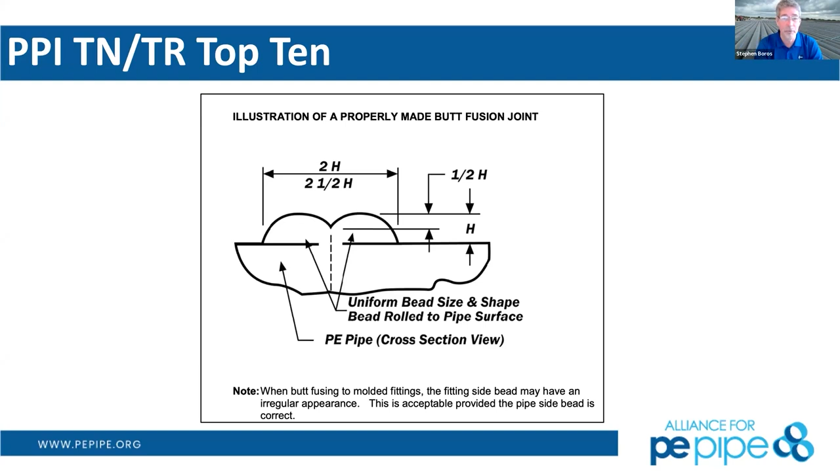And that was just timely enough for Stephen to be able to take it away here, Stephen. There we go, all right, thanks guys, I think I got it now. So let's start with the Plastics Pipe Institute top 10 resources, these are ones we picked that we thought would be the most of interest. And you have to remember there are dozens of resources available through the PE Alliance as well as the Plastics Pipe Institute.

One of the main resources everybody needs to be familiar with if you're going to deal with polyethylene pipe is the Handbook of Polyethylene Pipe. This is literally a culmination of probably 50 years of experience put together by various experts around the country over the years. It started out as individual reports, individual notes, individual documents, and over time we said, hey, we've got a lot of these things, let's put them into a manual. So this is the be-all end-all of polyethylene pipe.

It covers every application, every aspect of the material, shipping and handling, manufacturing, design of different types of applications, burial, marine environment, geothermal, all of it. So this is a great resource.

What's nice about it is it's available for free download. Every chapter is available as a PDF download from the Plastics Pipe Institute website, plasticpipe.org. Or if you're like me and still like a book, you can order a hardback copy at a very low price and have that on your shelf for review. It's kind of like a textbook—it goes through, gives you all the background and information, and then gives you examples of how to apply it.

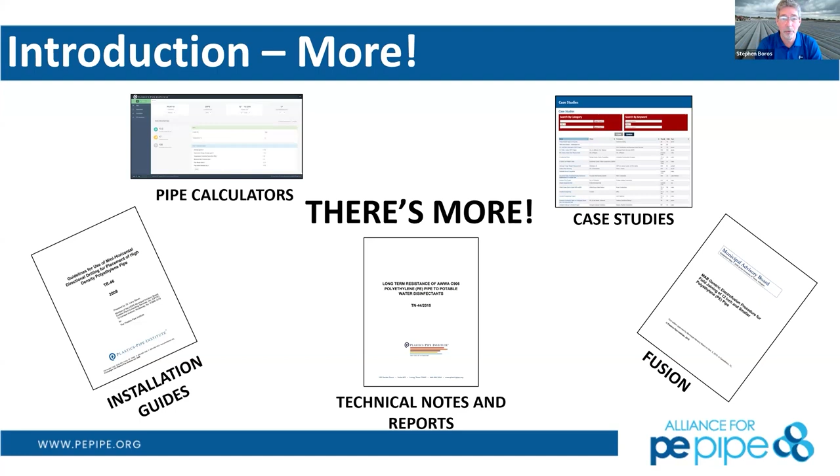Today, the scope of the presentation is going to cover more or less the specification—how do I specify polyethylene pipe for a water wastewater project? Then it'll go into some design aspects, cover installation, and some maintenance type things if needed, such as squeeze off, joining, and things like that. Then we'll get into specific topics from the PE Pipe Handbook, and some things outside of it, or the field manual for municipal applications, which again is available on the website for free download. So let's get into it.

The first document really gets into the base of where polyethylene pipe, or the polyethylene compounds used for pipe, comes from. The polyethylene used to make pressure pipe is an extremely engineered type of polyethylene. It's not the same type you use for trash bags, which is low density and very stretchy. It's not the same type your one gallon milk jug is made from, which again is polyethylene. It's not the same as your bleach bottle. Again, there are hundreds of types. The type used to make pressure pipe is a highly engineered compound specifically for this application.

It goes through a lot of testing, analysis, and verification of its long-term performance properties, short-term and long-term, to verify it can be used in a long-term durable application such as pipe. Each compound is then listed by the Plastics Pipe Institute in a document called PPI's Technical Report 4, or TR4. It lists the hydrostatic design basis, hydrostatic design stress, and MRS, if it has one, of those listed materials. So it's a great resource to go see: does my pipe manufacturer use a material listed in PPI TR4? That means it's gone through this analysis.

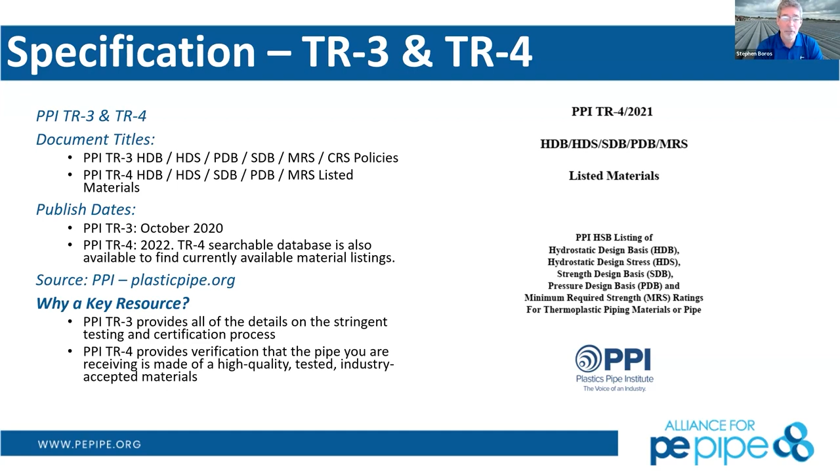So you can see just this region becomes pretty flat. So this is how we determine the long-term HDB, or hydrostatic design basis, that this material can be used at. And the definition of HDS is a stress level with high probability that failure will not occur. So that's where we start our calculation about how we get from a stress in the material to a pressure rating for the pipe.

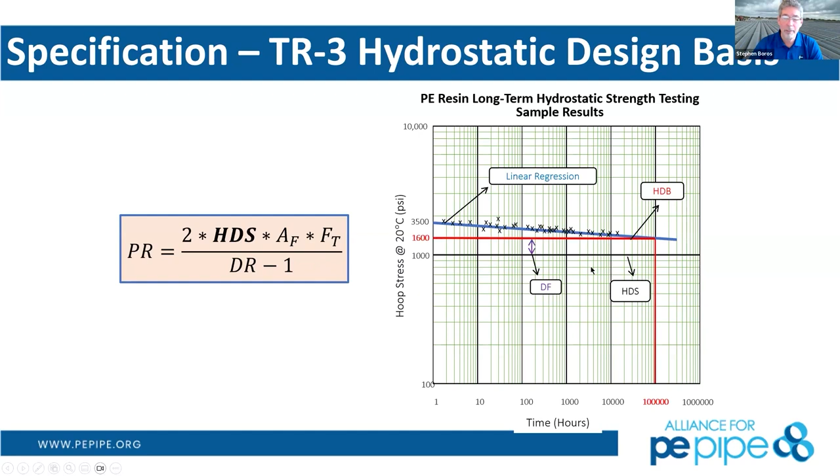But this is for 73 degrees in a water environment. This is the long-term strength that the pipe or the material can handle.

So when you go to PPI TR4 and look at something like PE 4710 materials, you'll see listings of what's called dependent listings under pipe manufacturers. Each pipe manufacturer will have compounds that they're approved for. They've gone through an evaluation process that shows they can reproduce these compounds that have the PE 4710 designation and utilize those to make pipe with.

And so if you want to approve your pipe manufacturer, you can go in and take a look, and have a requirement in your specification that your pipe manufacturer must have a listing in TR4. That means it's another level of scrutiny that's been put on that product, that they're using the right materials for the right application.

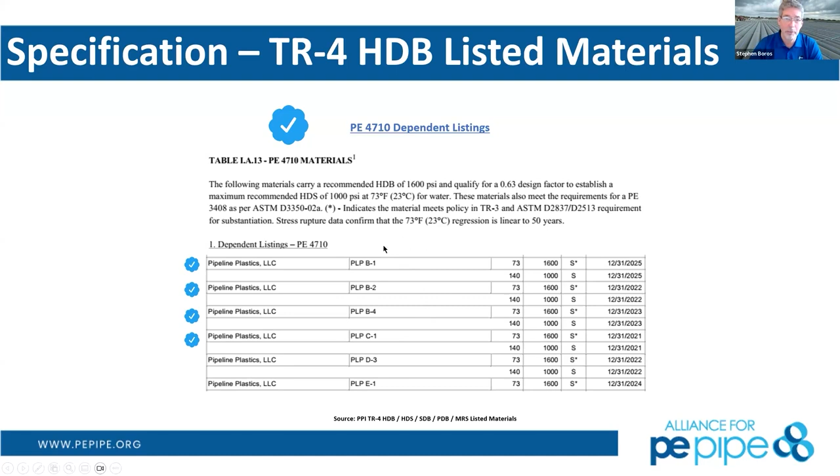Now, it's interesting to point out, I'm just showing polyethylene here, but every thermoplastic material goes through the same process used in North America. That goes for PVC, every PVC compound used is also listed in this document. Polyamide materials, CPVC for hot water applications, cross-linked polyethylene for hot and cold plumbing applications, they all go through this exact same evaluation process and are listed within TR4. That's how important this document is to our industry.

The next document is going to be coming from the PPI's Municipal Advisory Board, or MAB. That's an independent group of municipal engineers, contractors, university professors, design engineers, and other experts from the industry that say, all right, what information do we need for municipal applications specifically?

So they say, well, the first thing we need is a model spec, so you've got to know how to specify polyethylene for a potable water service, distribution, or transmission system. This document was actually just updated in 2024 and republished, so this is the best, latest, and greatest information on how to specify all aspects dealing with polyethylene pipe for water applications, how to specify the material, how to specify the pipe manufacturer, how you're going to join it, how you need to be qualified to join it, how you need to store it and ship it.

It goes through all of those aspects, so you don't have to start from scratch as a design engineer or an owner that wants to specify this. This is a great template that'll give you 95% of everything you need for your project, and then you can take it and customize it for your specific application.

So it covers how are you going to do the installation, how are you going to reference AWWA M55, which we'll talk about later for burial and backfill. So it goes through all of those things so you don't have to research all that yourself.

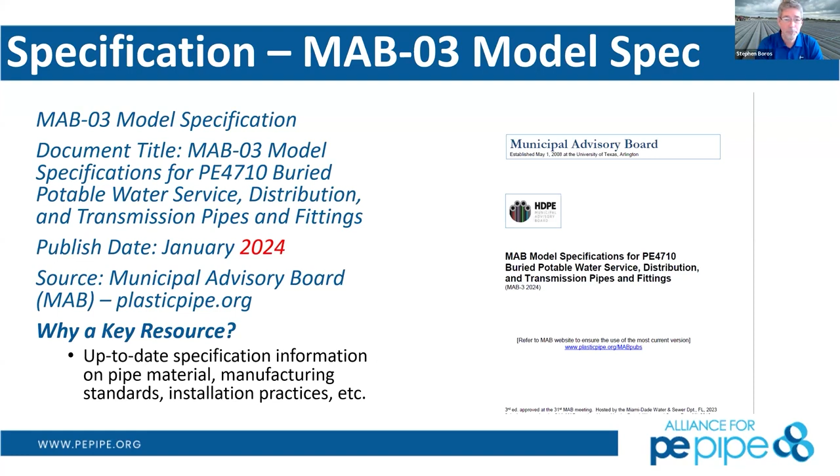Some of the things you'll see in the model spec, it's going to specify the types of material, PE 4710 pressure classes. You can see here for the larger diameter, C906, which covers 4-inch through 65-inch pipe. You have DR17, DR13.5, DR11, and DR9 are all allowed within this document. So that gives you a pressure class rating from 250 PSI at the heavy wall DR9 all the way down

to 125 PSI working pressure rating, surge is on top of that. We'll talk about that later, for a DR17. So you have allowable surge for that DR17 at 188 PSI, and your occasional surge is all the way up to 2 times the pressure class, 250 PSI.

Now, the one thing to note here is that for AWWA C901, which is for small diameter water service lines, 1/2 inch through 3-inch, for water service lines, C901 now only recognizes DR9 for that application. Because it is such a rigorous application, this covers all installation and burial and usage aspects for a service application, because we know it's not going to be buried with the same amount of rigor and care that a distribution or transmission line would.

It's going to be a shallower bury mainly, usually 12 inches or less. Not always, but can be. And so a DR9 will give you more robustness for that product to assure that you still have that 100-year design life.

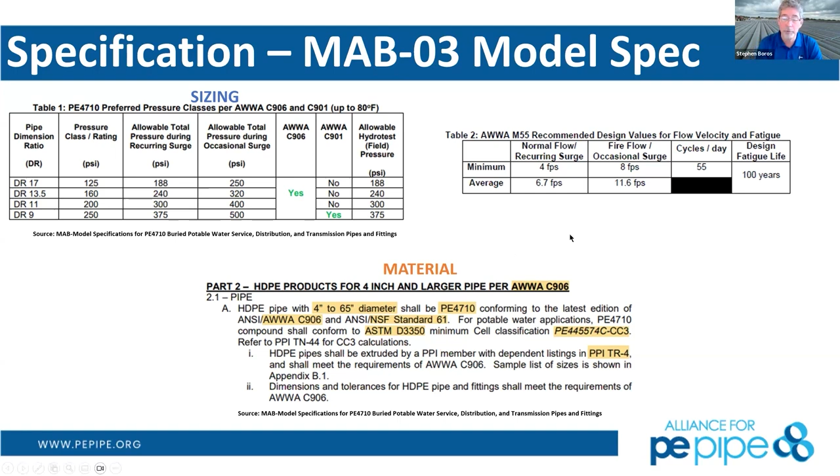Great question, thank you.

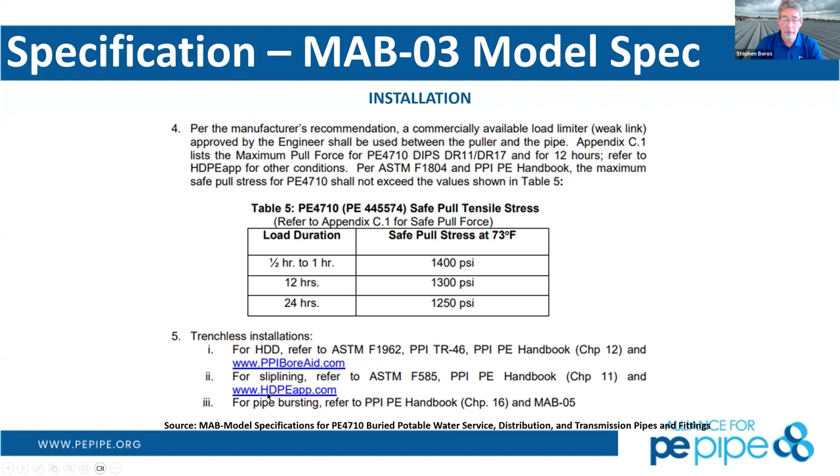Real quickly, just to flag this up here - also on trenchless installations there's some other documents you can go to, ASTM F1962, which is for maxi horizontal directional drilling guidance. Or you can also go to PPI's BoreAid, which is a soft online software which will give you directional drill protocols and designs, so you can get a first look at how that directional drill is going to look - what sizes do I need to use, what angles can I use, what depth do I need to go to, different things like that. And HDPE app is the design software that pretty much covers everything in the PE pipe handbook, covered in real-time calculations online at these URLs for the PPI handbook and design.

So another thing we see a lot about is blocking, anchor blocking, and how do you restrain polyethylene pipe? First of all, know that it's very easy to restrain polyethylene pipe because it has a lower modulus than other materials. The resulting force from any type of thermal cycling event, or soil movement, the amount of force generated by the polyethylene is going to be much, much smaller than it will be for that same event on a metallic pipe such as ductile iron or even PVC. So you have to look at it individually.

There was a new study just put out by Cornell University that was sponsored by the Plastics Pipe Institute. They looked at all the aspects of a buried pipe design that we didn't take into account before, and then came up with new anchor block sizing requirements. All of this will be put into the PE pipe handbook when it's redesigned, but it's already included in the HDPE app software online, so if you want to take a look at that.

Let me go back real quick. So what it did, and this last bullet point is really the crux of it - it said, all right, let's look at soil restraint, let's look at temperatures, let's look at what really happens to this system when it's buried in the ground. And what it did is it essentially took the old design of anchor blocks and cut those to about a third of what they would have been in the past.

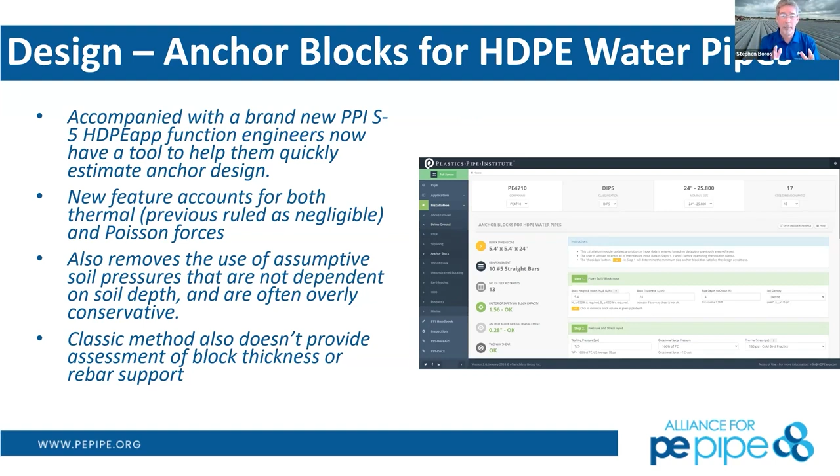So it really reduces the amount of blocking that you need overall. This new design, as you can see in this example from the HDPE app software, gives you for a certain situation, say 24-inch pipe DR17, what your block dimensions need to look like and how much reinforcement you need. So it takes all of these things into account with the Poisson's forces and ratios that it didn't before, to give you a proper anchor block design that'll work to make sure that if you are hooking up to a valve body that you don't want to move in any way, it can restrain that and it won't be an issue.

The other document, which again was updated, I think maybe 2 years ago now, is the AWWA M55 Design and Installation Manual for Polyethylene Pipe. This is a great resource. It's strictly focused on municipal applications, and it has 11 chapters, all dealing with engineering properties of the material.

How you come up with the different working pressure ratings, pressure classes, and surge capacities for these different pipes. External loads, chapter 5, was all redone by Amster Howard recently to make sure everybody's using the same terminology and the same type of compaction and soil requirements for that flexible pipe design interaction that you have to have with any flexible pipe design, which is ductile iron, PVC, corrugated metal, polyethylene. All of those use the exact same design practice, a pipe-soil interactive design, to make sure you get properly compacted soils to give you a nice round pipe and not overly deflect it during installation or use. So all that's been revised to give you the latest and greatest joining and fittings available.

There's been a big change in the fittings available in the last 7 or 8 years, with all the different types of mechanical fittings available: electrofusion fittings, MJ adapters, flange adapters. It talks about all of those, plus installation practices, maintenance and repair. That's a great chapter people need to be aware of. If the pipe ever gets damaged and needs to be repaired, there are very easy ways to do it.

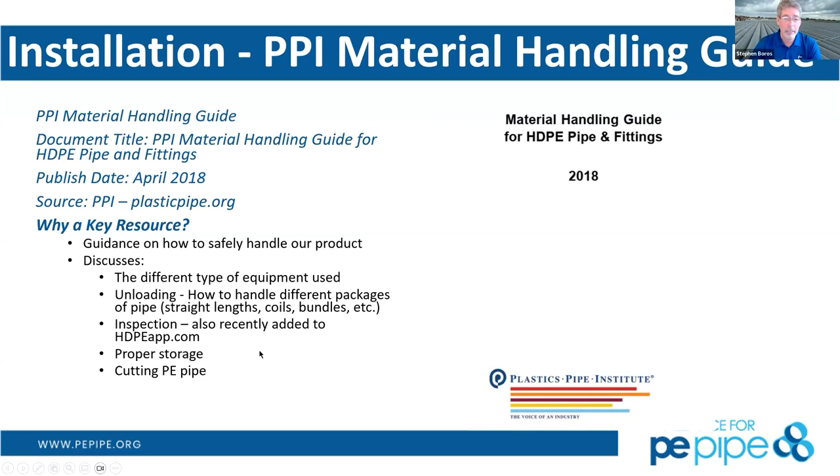The inspection of it when it gets to the job site is very important as well. You want to store it usually in a storage yard before it's used on the project, and you need to cut it to length in certain cases. So the handling guide talks about many aspects of that.

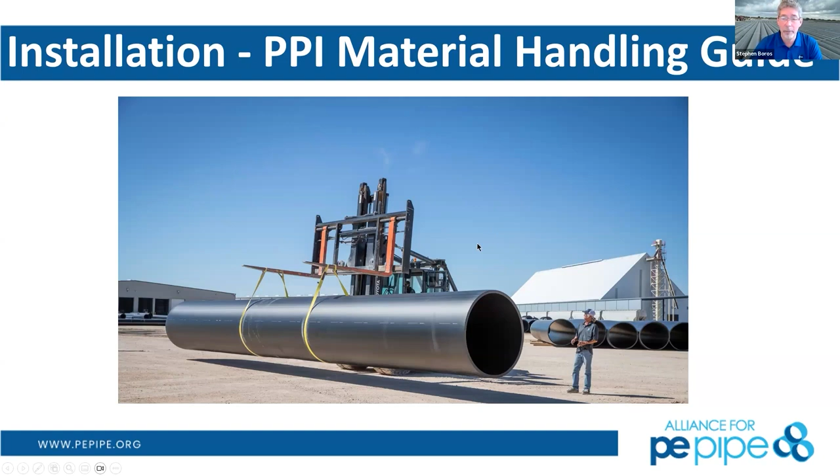You can see here, just as a quick example, this is a piece of 54 or 63-inch pipe out of one of our Texas plants. You can see that it's recommended to lift polyethylene pipe with nylon straps. This makes sure that you don't damage it. You have a large enough forklift or telehandler that can lift it properly, and you have crew people out of the way so the driver may not be able to see them. It takes that into account, and then you're going to lift it and put it onto the truck with certain chocks and blocks to make sure it stays put. So that's just a few of the basic aspects that you want to look at for polyethylene.

Here's one thing that you don't want to do when it gets to the job site. Let's take a look at this.

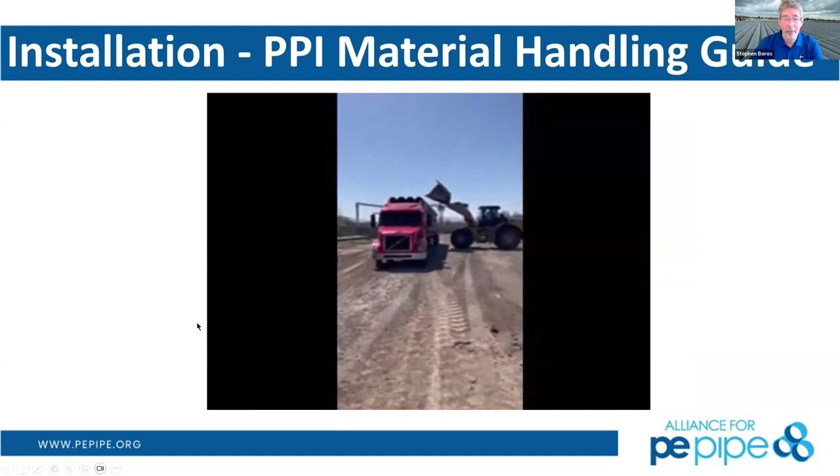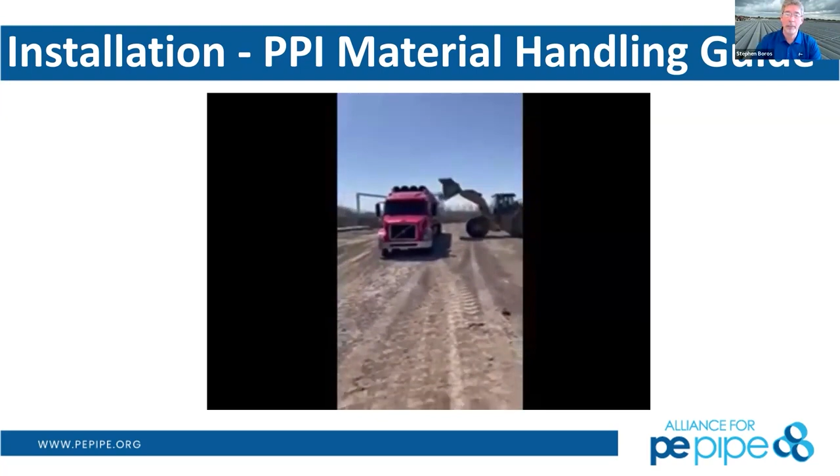This operator is very good at his job. You can see he's very good at lining up the bucket to make sure he's going to get what he needs to lift this pipe off the truck appropriately. He's taking great care and making sure he lines it up. And then once he is sure he's ready to go, he's going to unload this pipe in his own particular fashion.

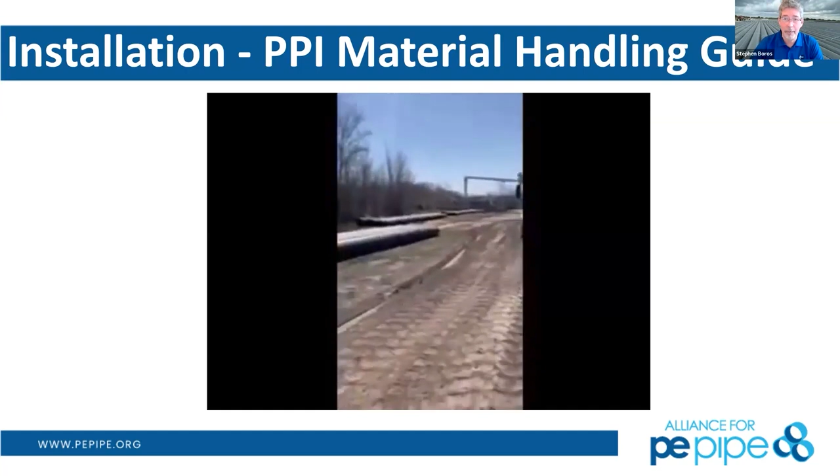Now, that's what you don't want to do when you unload the pipe. The interesting thing about it is the pipe wasn't damaged, so it's okay, but there's a lot of safety aspects associated with this. The truck driver actually took this video thinking, what is he going to do here? And so he knew something was going to happen that he wanted to capture.

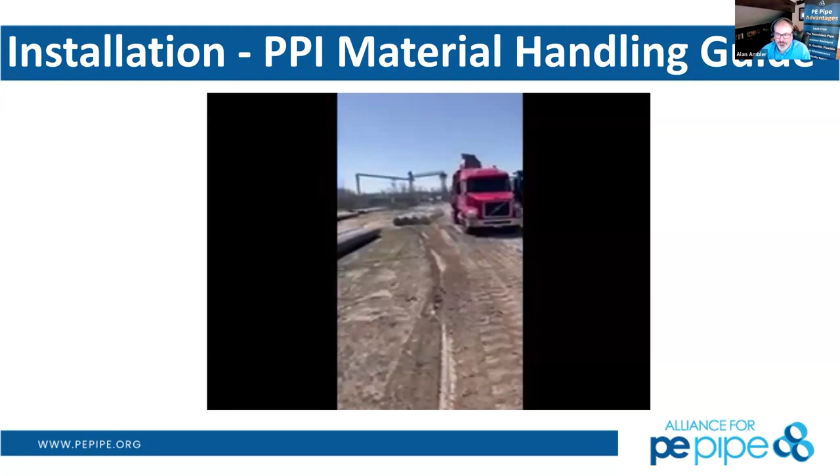So what do you have to say about this one, Alan? Well, sometimes we do get lucky and find those videos that show exactly what not to do, and this is one of those. So the Alliance does spend a fair amount of time trying to find videos and share it with us. We've got about 30 minutes left, Stephen, and you've got probably about 50 slides. So we'll have to pick up the pace, and hopefully Pete doesn't interrupt too much. You bet, keep it going.

The inspection form is very important as well. This is a great example, it comes out of MAB 6 for incoming pipe material inspection. It makes sure that you have the project name, the inspector name, and confirm what you're actually getting on that truck before you unload it. Are you getting everything you're supposed to be getting? Is it the right size, the right DR or wall thickness, made to the right specification? Does it have all the right markings on it for what you're supposed to be getting? Check all these things before you unload it.

That way, if there's an issue, maybe something wasn't shipped right or the pipe was damaged during shipment, you'll have all that documented before you unload it. It'll make it much easier to send that pipe back and have it loaded the right way, or to replace damaged pipe, than if you had to unload it and then try to load it back on the job site.

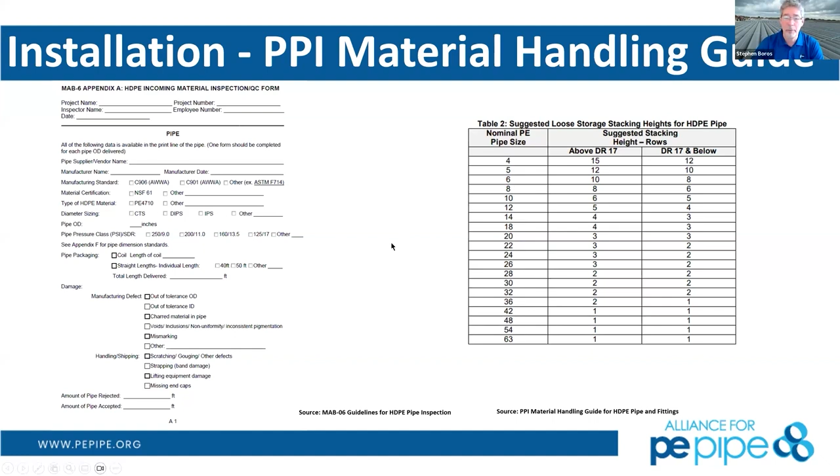Stacking heights as well. Polyethylene pipe you can stack, but the larger diameters, it's recommended that you don't stack more than one high. Once you get below 36 inch, you can stack it 2, 3, 4, even 10 high, as long as it's chocked and protected properly, so it's not going to fall off and roll over people.

TN51 talks about butt fusion. Butt fusion is the number one heat fusion joining method for polyethylene. It doesn't require a fitting, just a fusion machine to align the pipe and bring it together. Once it's fused in this manner, it becomes a monolithic pipe piece. There's no longer a joint that's going to come apart. That joint is now as strong as the pipe, fully restrained, and it won't ever be a weak link in your piping system.

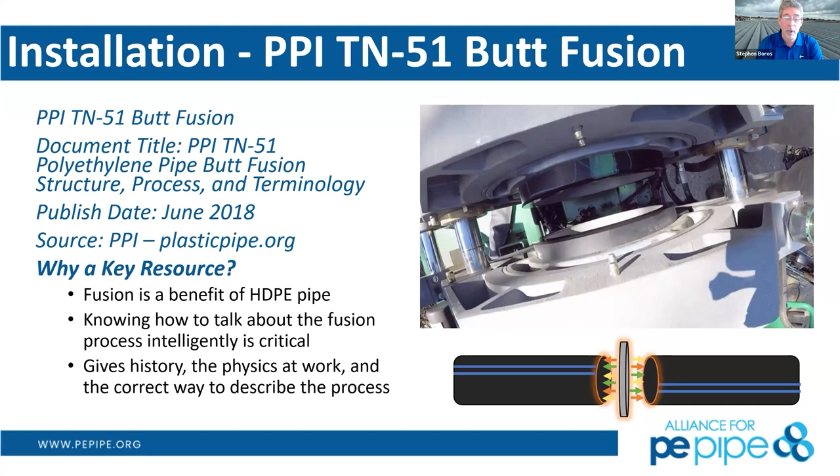So that's the number one way of doing it. There are mechanical options, and there's electrofusion options, which we'll talk about. But this is the main thing that you'll use day in, day out. It's a very simple process, and TN51 just talks through the steps and gives you the right references for how you go about qualifying a fusion joiner for that process.

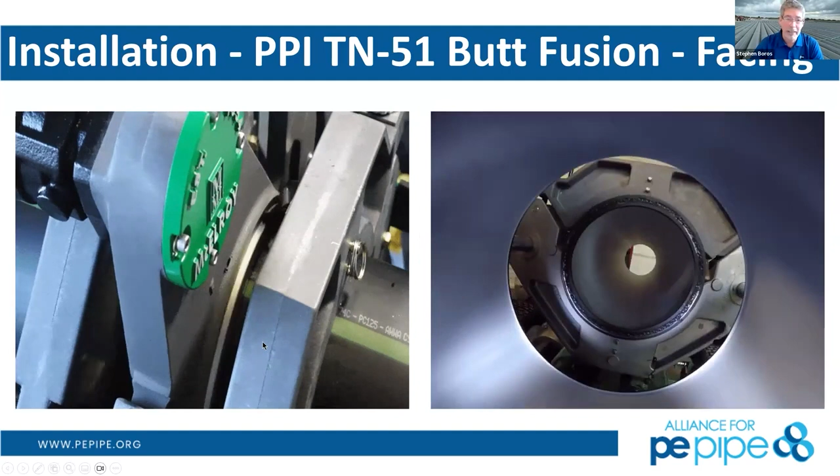You can see here, the first step is to face the ends. You put the pipe into the fusion collets and bring both ends together, and these blades spin slowly around it, giving you nice, clean, uniform, parallel surfaces so the pipe comes together in a uniform manner. This is the first step in the fusion process, and probably one of the most key parts of it.

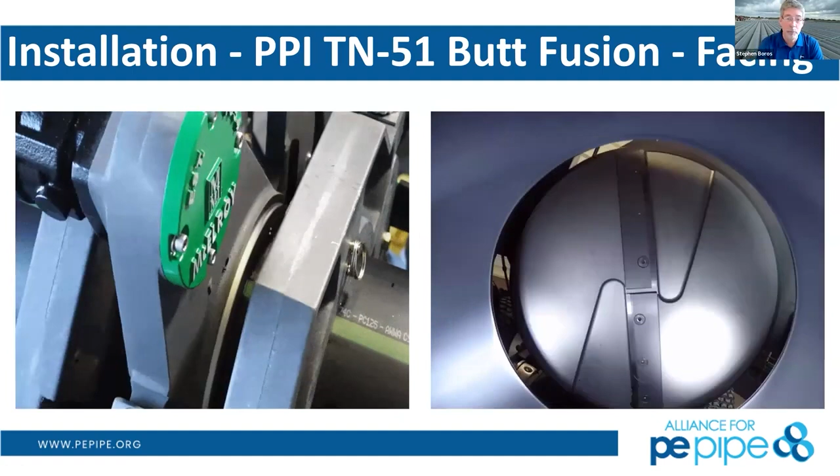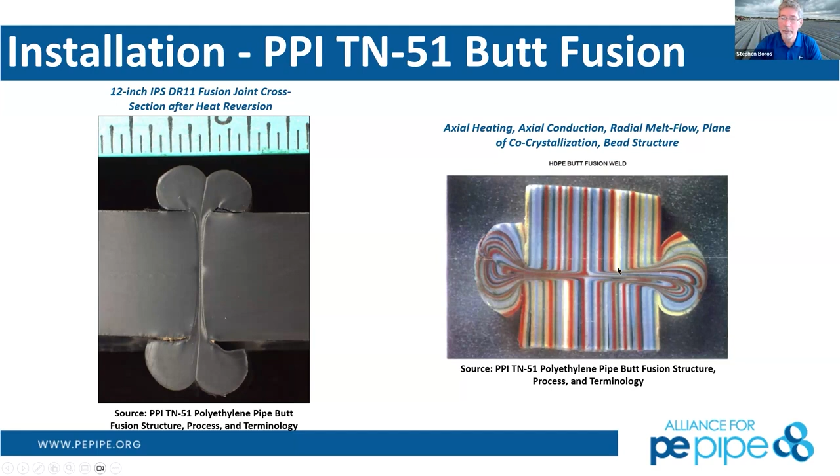You can see on the picture to the right, which was a very unique piece of pipe - I'm not sure if it was made on purpose or by accident, but it gave a good graphic for this example. When the pipe ends are brought together, the melt is extruded out this way, and that interface is right here in the middle, which gives you a co-crystallization zone, where you get that real entanglement that gives you a fully strong joint. It's not just touching together or mechanical adhesion. This is a true intermolecular crystallization area that gives you a 100% strong joint.

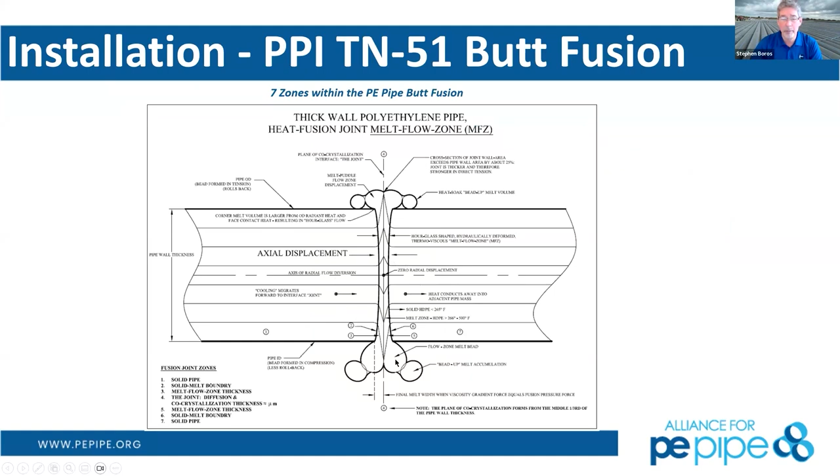Again, the different aspects - if you want to see the details about what's really happening when the two ends come together, you have the melt zone, the radial flow, diversion, the melt beads. You can take a look at that. All that is included within this document as well.

The next method of joining, which is very popular if you can't move a piece or you have a specific situation, is electrofusion. Electrofusion couplers are very common - electrofusion tees, tapping tees, saddles, whatever it might be. Electrofusion is an excellent alternative for that.

The Municipal Advisory Board has published 2 documents for that. They did it very early on in their development - the first documents were MAB1 and MAB2. One handles 12-inch and smaller polyethylene pipe, the steps to go through to make sure you get a good electrofusion joint. Then if you're doing larger diameter, 14-inch to 30-inch, it goes through the guidance about what you need to do, what you need to look for, steps you need to take to make sure you get a good joint.

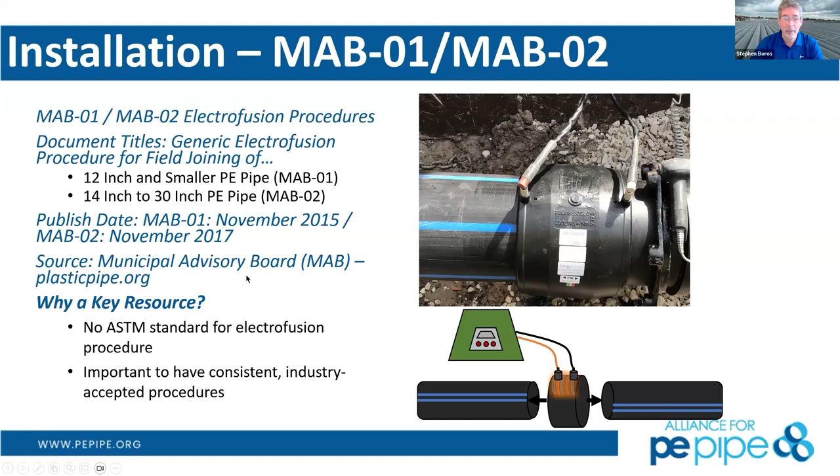Why is this important? Because you have to go through the steps to make sure you're going to get that good joint. If you go through the steps, it's going to work every time.

Very quickly, these are the steps. Cut the pipe ends, clean the pipe ends - can't stress this one enough, this is the first cleaning step. Mark the stab depth of your pipes - how deep does it need to go into that coupler? Then you're going to scrape or peel the surface off. That's going to give you a nice clean surface that the electrofusion coupling is going to bond to, and this is a very key part of that. Then you're going to make sure that when you stab it to the mark depth, you're going deep enough to get full stab of those couplings on both sides.

Then, if you need to, put it in rerounding clamps and alignment clamps to hold that in alignment, make sure the pipe's fully round and fully in alignment to go into that coupling. Connect it to the electrofusion box, press the button. It's going to go through its process because it's read the barcode of that fitting, so it knows exactly how much energy to put into it to join it the right way.

And you're done. Isn't that about it, Peter? Or isn't that about it, Alan?

Yeah. So the key difference between electrofusion and butt fusion is there's a little bit more operator processing on the electrofusion, and in both scenarios we're getting back to virgin resin. So exactly the same things that Stephen and his company would do at the extrusion facility when they're controlling virgin high-density polyethylene resin material to get it into a pipe, even before it's delivered to your site, we're just doing the same exact thing to ensure the health of that fusion joint.

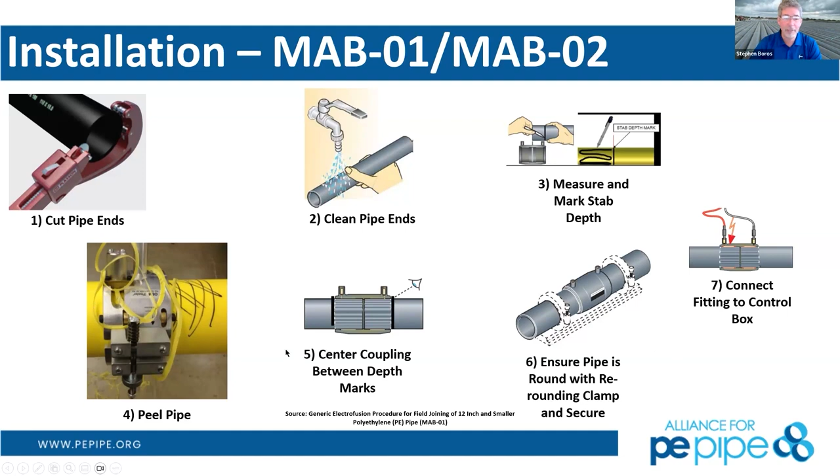So that's definitely good steps to follow, Stephen. You're very succinct and specific. Love it, keep going. Can't overemphasize the cleaning portion of this enough - that's what's going to give you a good joint.

So if you can't do a butt fusion or electrofusion, you may need to do a flange adapter. Flange adapters are very common to flange up to an appurtenance - maybe it's a tank, maybe it's a valve, maybe it's a flow meter, whatever it might be. There are flange adapters available with what they call stub ends, that you fuse onto the polyethylene pipe, typically with a butt fusion. And then that allows you to flange up to another appurtenance.

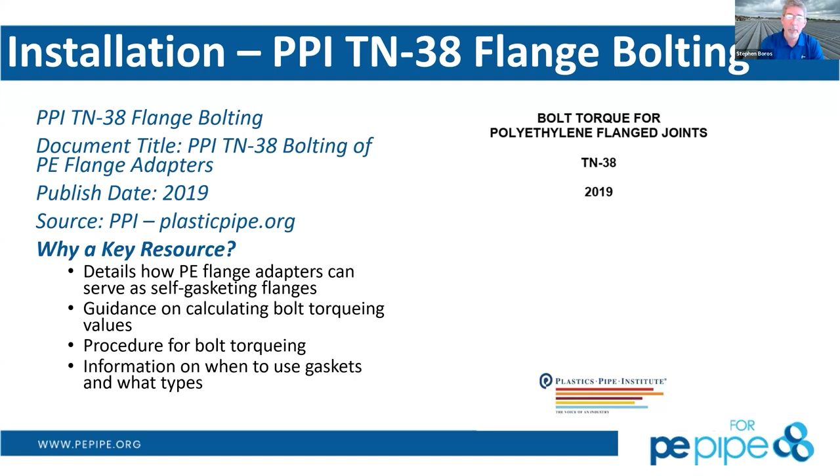PPI's TN38 is how you go about doing that, and more importantly, how you go about torquing those bolts to make sure you get a nice, even compression of that flange adapter.

So what you want the bolts to do: the bolts have to overcome the pressure, the surge, any type of thermodynamic or temperature contraction or expansion, any type of bending that might occur, flange alignment, and then whatever variance you want to take into account. The force in these bolts has to be greater than all these other forces trying to pull that apart.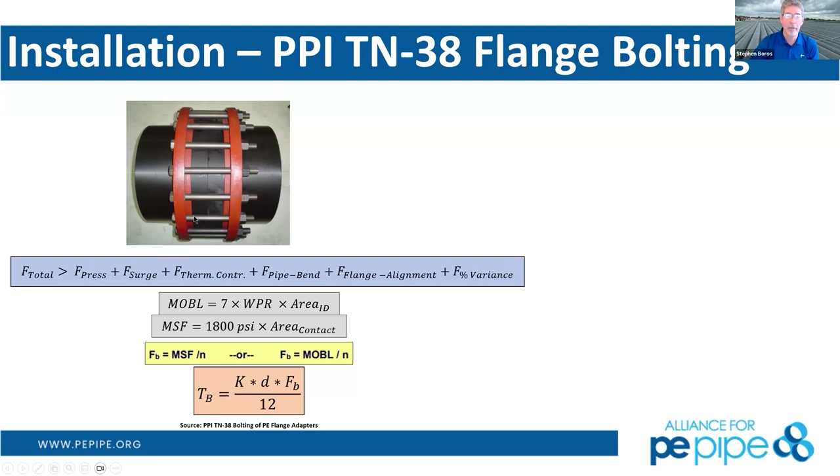So once you go through that calculation, you can see that there's a certain torque value you need to put on all these bolts to make sure that you get the right contact area and you get a fully sealed flange. Now, the nice thing about polyethylene is you don't have to use a polyethylene to polyethylene flange adapter joint - it does not even need a gasket, as long as it's aligned properly and as long as the bolts are torqued properly. So this is just an example.

If you're doing less than 18-inch pipe, you do the 30-30 rule. You're going to tighten it 30% of the recommended torque value, then that's to seat it all. Then you're going to start with the star pattern: go to the first bolt and tighten an additional 30%, go around to all the bolts and do that, then go back to bolt 1 and tighten it the rest of the value. Now, the last step is you're going to let that sit for 4 to 24 hours for it to relax and get in its final state. And then you're going to come back and do one more final torque to that torque value again to fully seat everything and make sure you have a nice tight joint.

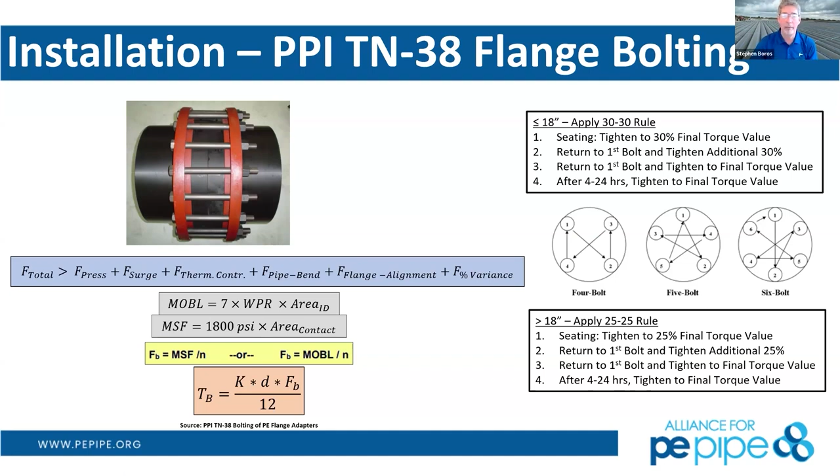If you're going to do greater than 18-inch pipe, you do the exact same thing, except you go through one more step and you only start with 25% of the torque value, additional 25%, and then the final value after, again, that 4 to 24 hour period to allow it to relax and creep a little bit, if you will, and make sure that you're going to have that final force where you have a flange joint that won't leak.

If you are going to do butt fusions, which is the predominant way of doing this, you're going to say, well, how do I know that butt fusion was done properly? Well, there's a device out there called a data logger, and it records the pertinent key data information and parameters of that fusion joint. And if you can see this, you had a 99% chance that all those joints are going to be good. Now, I say 99% chance because the only thing that could possibly go wrong is if some dirt blew in there or something like that that wasn't taken into account.

That's the only thing this type of data logger won't record. But everything else, as long as it goes through this process and you record the steps, you can be assured that you're going to have a good, strong joint afterwards.

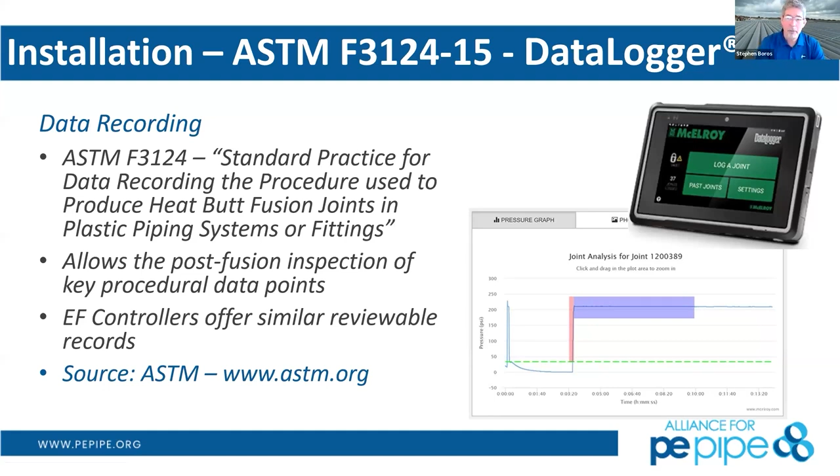So this is what a typical graph from a data logger will look like. This is pressure on the y-axis and time on the x-axis. So first, the first few seconds of the fusion process, you're going to bead up. What that means is you're going to bring those pipe ends together that you've already faced and got very clean and uniform and parallel to each other, so they're very symmetric, and you're going to bring them up against the heater plate.

The heater plate is going to then start to bead up. You're going to see a melt bead all the way around that pipe. Once you see that melt bead first coming up, then you can reduce the pressure, the interfacial pressure of holding those ends together, and you want no interfacial pressure during that heat soak. Now you're just putting all that heat into the polyethylene and melting it back to a certain point, several thousandths of an inch back in there over this whole heat soak time, which is again a known value for the size of pipe that you're using.

You're going to remove the heater plate. You're going to bring those molten ends back together now with a known and controlled, what we call interfacial fusion pressure. And that's going to be this part here. This is when that whole joint's being made. You're going to bring it together. You're going to get the rollback beads. And now that joint's done.

Now what you have to do, though, is you have to hold that interfacial pressure during the cooling cycle to make sure that it doesn't move or get pulled apart while it's going from that molten phase to the solid phase and then cooling back down to a temperature that you can then take it out of the fusion machine and start moving it around.

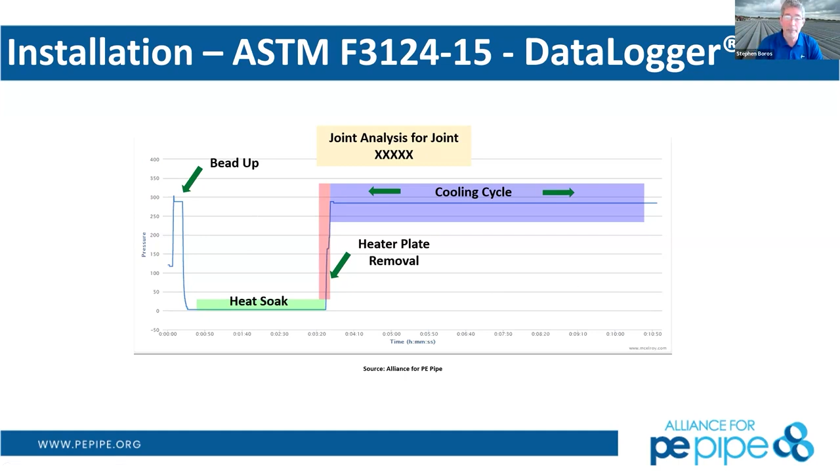Another thing that's unique to polyethylene pipe is squeeze off. People that haven't seen this before don't believe it, but I can guarantee you it is true, it works, and it's a great aspect of polyethylene pipe that can be taken into account. It was actually pioneered by the gas distribution industry into how they can squeeze off polyethylene gas distribution piping to do a tie-in or repair, and then open that pipe back up and the pipe's not damaged. And you can do that with pipe today up to about 24-inch diameter, which is about the largest I think they have a squeeze-off tool for.

And there's a guide for this, PPI TN 54, General Guidelines for Squeezing Off Polyethylene Pipe for Water, Oil, and Gas Applications. This is going to be different from gas distribution applications, which has some different types of caveats in it. But with this, you go through this methodology, and this will make sure the pipe is not damaged.

I'm not going to play the video here because it takes a while, but this is essentially what a squeeze-off tool looks like. It's a barred tool, barred on top and bottom with a very specifically designed radius. And then you squeeze off at a very specific squeeze rate, do your repair, and then you release that squeeze again at a very specific rate. That's going to be key in this process.

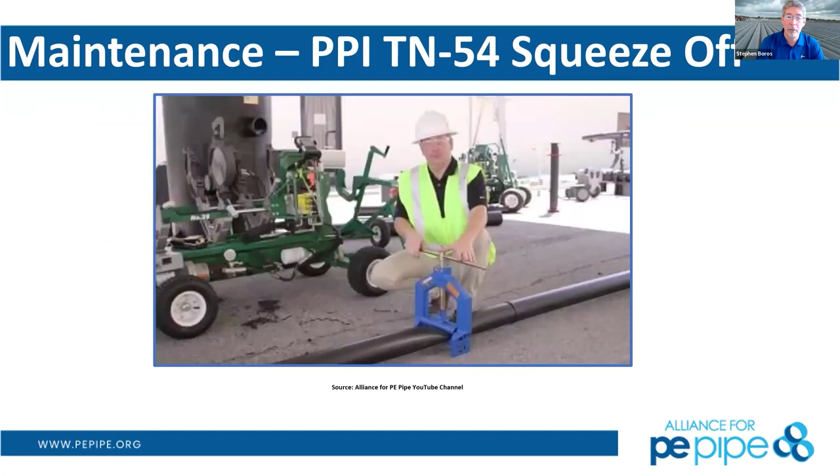So for example, within this document, TN54, it's going to tell you for every size pipe what is the proper parameters for that. So let's look at 16-inch DR9, pretty heavy wall pipe. That's going to have an ID of 12.2 inches. Your squeeze rate, bringing those two bars together, is going to be 2 inches per minute, which is the recommended value. And it's going to take you 6.1 minutes to squeeze that pipe totally closed with a proper amount of wall compression. If you're below 32 degrees, that time's going to double, and your squeeze off rate is only 1 inch per minute.

You do your repair, put a tie-in in, whatever you need to do, and then you have to release that squeeze. The release is going to be slower than the compression—that's very key. This is when the damage could possibly be done, so you have to go very slow to make sure the pipe is not damaged on the ID during that release. Normal release time above 32 degrees will be half an inch per minute.

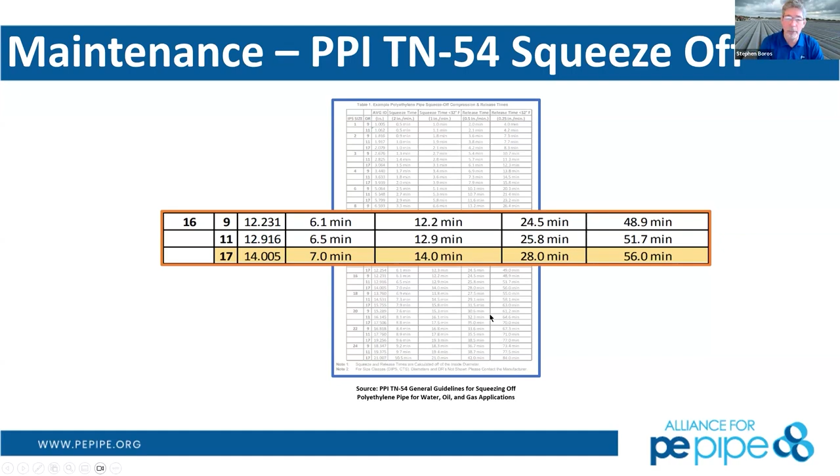That results in almost 25 minutes just for the release time on that 16-inch pipe. If you're below 32 degrees, you have to double that again, down to a quarter inch per minute, up to 50 minutes to release that squeeze and make sure you don't damage it. All this is detailed within this document—if you follow those procedures, you won't have a damaged pipe, and it won't be an issue.

So if we didn't do that, Stephen—water main breaks, of course, don't happen at 9 a.m. on a Monday after you've had your coffee. They're at 2 a.m. and someone wants to get that water shut off. We just go back through and put a repair clamp around that at that time, right? Oh, absolutely. That's the thing too—you can just throw a repair clamp on it right then if you want. Any repair clamp you use on ductile iron or PVC, you can use on polyethylene to stop that leak immediately. Then you can use a squeeze-off to cut that piece out later and make a permanent repair.

Okay, we've got quite a number of slides to go through, and right now it's 3 o'clock, so we've got about another 15 minutes. I'll have to accelerate you a little bit there, Stephen. There we go, alright—thanks for keeping me on track.

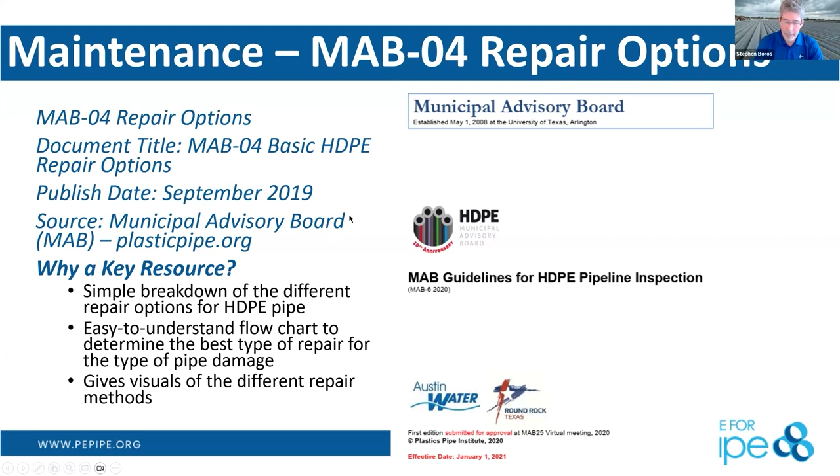Repair options—another very good document to look at. We get that question a lot: I'd like to use polyethylene pipe, but what happens if it gets damaged? What if a backhoe hits it, or I need to repair it, or a directional drill hits it? The Municipal Advisory Board put together this quick document that gives you a flow chart based on the type of leak or damage you find.

Is it a one-hole puncture? Is it punctured on both sides? Is it totally severed? What type of repair do you want to do—mechanical fitting, electrofusion? It steps you through the process. If you do this, you remove the pipe segment with butt fusion and install a new segment with two electrofusion couplings. There's your repair option for that situation.

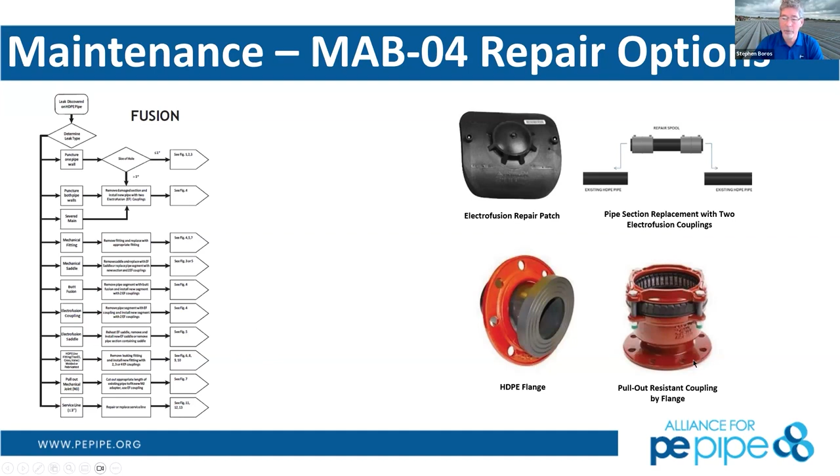So you don't have to know everything about it—it steps you through and gives you the most logical and reasonable repair option available. You can see there's a multitude of repairs: electrofusion repair patch, electrofusion coupling to put a new pipe spool piece in, a flange adapter if you'd rather go to a flange, or a fully mechanical coupling with full restraint, which works just as well.

The same thing we just went through—trying to hurry up a little bit. Wait a minute, I think we're about done, aren't we? Where are we?

So we talked about important resources such as AWWA C906. AWWA C906 is the standard for polyethylene pressure pipe, 4-inch through 65-inch, for water and wastewater systems. You've got some case studies after this—this was just summarizing the resources.

Perfect, here we go—horizontal directional drilling. Polyethylene is the number one material used for all HDD applications. It's not used for all of them, but it's number one in about 65% of all HDD installs using polyethylene pipe. F1962 is a great guide for how you design and utilize polyethylene pipe for these systems. Also, for underground installation of sewers and other gravity flow applications, take a look at ASTM D2321.

Case studies. Nobody wants to be the first one to say, well, I don't know, polyethylene's this newfangled thing. It's only been around for 60 plus years. I don't want to be the first one to use it for this application. Well, I can assure you, you're not. There's hundreds and hundreds of case studies. Polyethylene's been used as a pressure pipe for 60 plus years, so every application it has been used for, there's case studies around all of those.

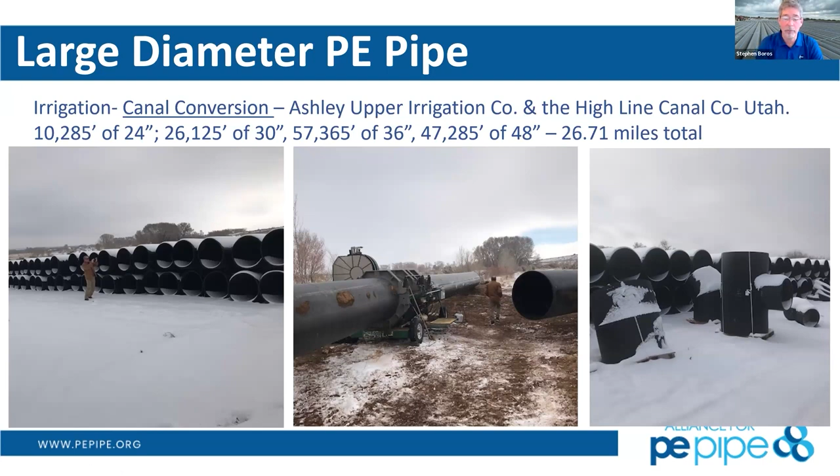Force mains. Again, we see polyethylene now becoming probably the number one material for replacing failing force mains. That's probably the most rigorous application out there in the water and wastewater area because of the constant cycling of the pumps and the cyclic fatigue these are going to go through. It's going to tear up a lot of different types of appurtenances and piping materials. Polyethylene, because of its surge capacity and ductility, is uniquely designed and capable of handling this. So we see polyethylene being used many, many times to replace these failing systems.

This is Westminster, California force main replacement, 20,600 feet of 36-inch DR17. They ran dual lines of this to have a redundant system. We see it all over the country, this going on now for larger diameter force mains and polyethylene replacing that. And then there's another job for a low pressure force main in South Beach that was 4,500 feet of 54-inch.

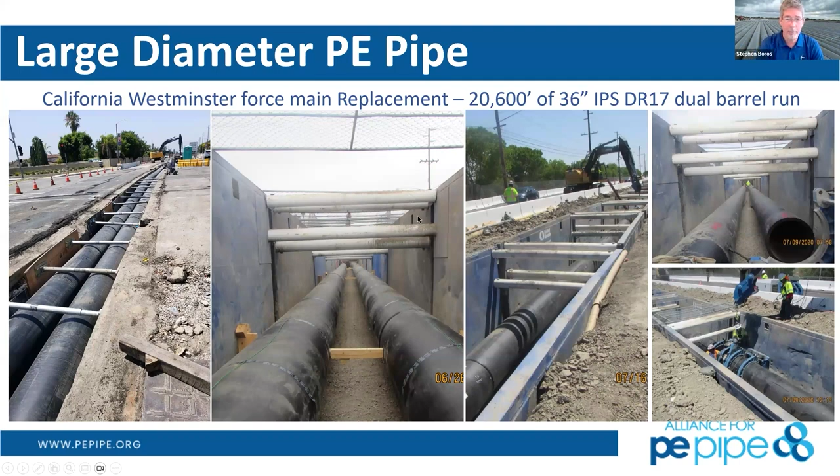One of the things I'd like to point out specific to this picture is this contractor understood the paradigm shift in installing pipe and more production through opening up larger areas. So they went and rented more trench boxes. They'd already disturbed the center median for this roadway, so they figured, let's just go ahead and get as much installed as possible. They're starting to see that production run by installing more pipe all at once. So definitely a good way to do it. Glad you brought these up, Stephen. Like I said, fuse up large sections and pull them all into place at one time, get them in there, do your backfill, and you're good to go.

So there is some software out there too. I'm not going to get too much in depth on these, but these are great online tools to go to. You can play with different scenarios and try to see what type of design you need, or different flow capacities, frictional losses, with the HDPE app calculator at www.hdpeapp.com. I always wonder why they called it HDPE app - I was told it was designed like an app for your phone or smart device, but it's not certified as an app. So it's a piece of software that resides at this address that works as an app, and you can use it on your phone or tablet as well through this website.

PPI BoreAid - it's a great first look tool at a directional drill job. It'll give you all the guidance you need to see what DR you might need, because that's going to kind of direct your application depending on how long you're going to be pulling that through, the depth of burial, and whether that DR selection will work, or do you need something heavier, or will something lighter actually work. Great tool for that.

And then you also have the PPI PACE software. This is probably my favorite software because this goes through the pipe analysis and calculation environment developed by the University of Waterloo, at www.ppipace.com.

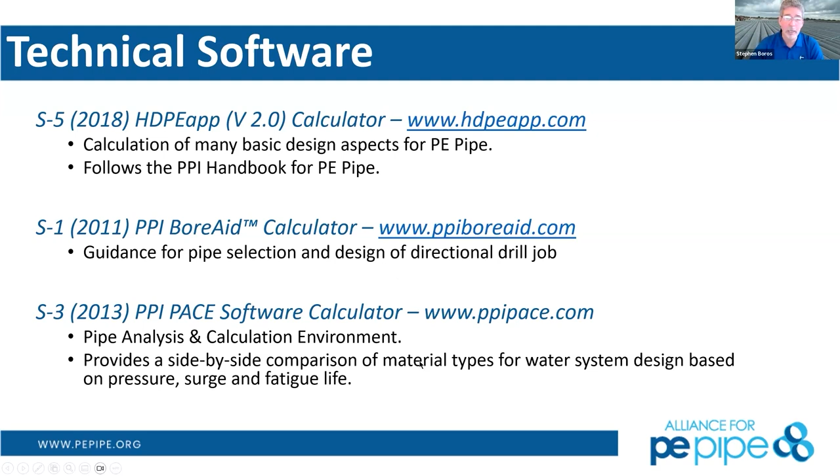That'll give you a real world side-by-side comparison in an operating environment for ductile iron, PVC, and polyethylene to show you what you need to pick to get a comparable design off each material. It's going to be different - their pressure classes mean different things.

So back on the HDPE app, this is what you're going to see. Click on the accept button, and they're going to come up with very basic pipe information. Put in the size of the pipe you have, 12-inch DR17, DIPS OD sizing, and it'll give you basic information - outside diameter, pressure rating.

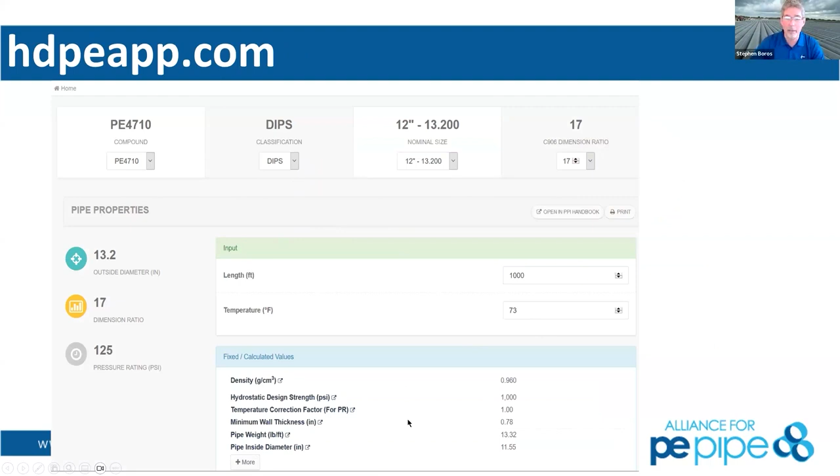Let's say it's 73 degrees. Here's a bunch of calculated values. Click on this more button, and you'll see a list of about 15 different types of values related just to that piece of pipe. Great place to go to, great resource.

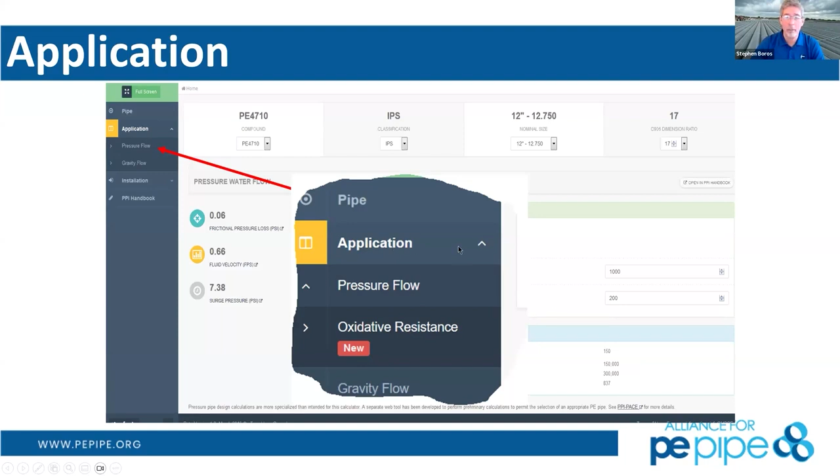You can look at operating conditions, so let's look at the application. Let's click on pressure flow - what am I going to get with that? Let's say you have a piece of 8-inch IPS DR11, you've got a mile of it, operating at 80 to 100 PSI, and I need to get 750 gallons per minute through that pipe. What's going to be my pressure drop needed, and at what velocity? Those are two very key design aspects.

So we know right off the bat, without even going to the software, that DR11 has a max pressure rating of 200 PSI at 73 degrees. It's also going to have 1.5 times that in recurring surge capacity - up to 300 PSI on an everyday basis, 2 million cycles, 55 cycles a day for 100 years. And occasional surges, a few million cycles over 100 years, at 400 PSI, double the pressure rating. We know that just off the bat.

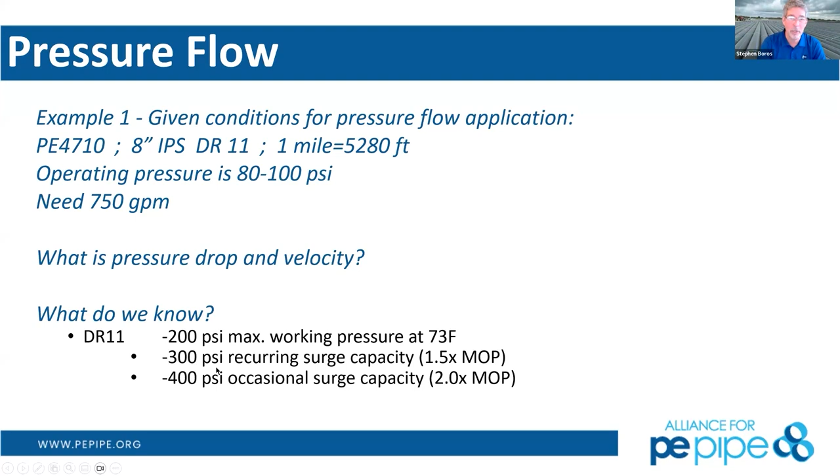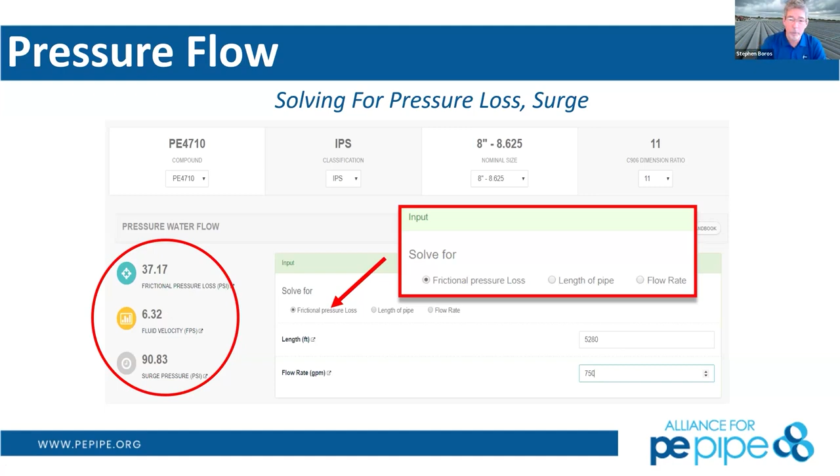So you go to the HDPE app, let's say I'm going to solve for frictional pressure loss. At a mile of pipe, at 750 gallons per minute, I'm going to have a frictional loss of 37 PSI and a fluid velocity of 6.3 feet per second. That's well within the design window of polyethylene pipe, so you're not going to have any problems. You can even go up to 12 feet per second with polyethylene pipe and not have any issues based on surge. You can play with all these different ways of solving that.

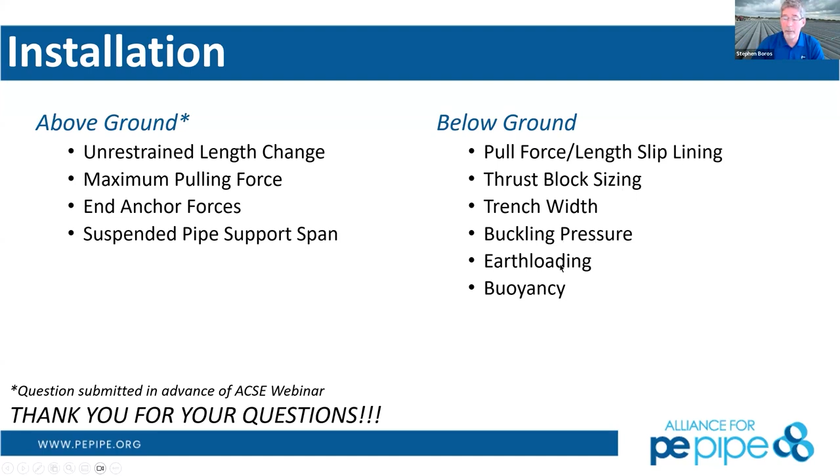You can look at installation, unrestrained above ground applications, and below ground applications. It talks about maximum pulling force for slip lining or above ground anchor forces, suspension - what's my suspension span if I'm going across a bridge or something like that? Below ground, what's my pull force for slip lining, thrust block design, buckling pressures, earth loading, buoyancy - all that. You can go through those calculations and try different scenarios.

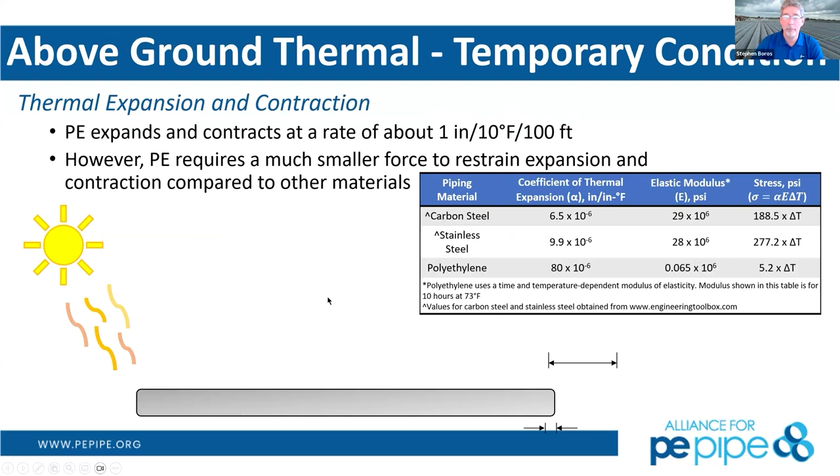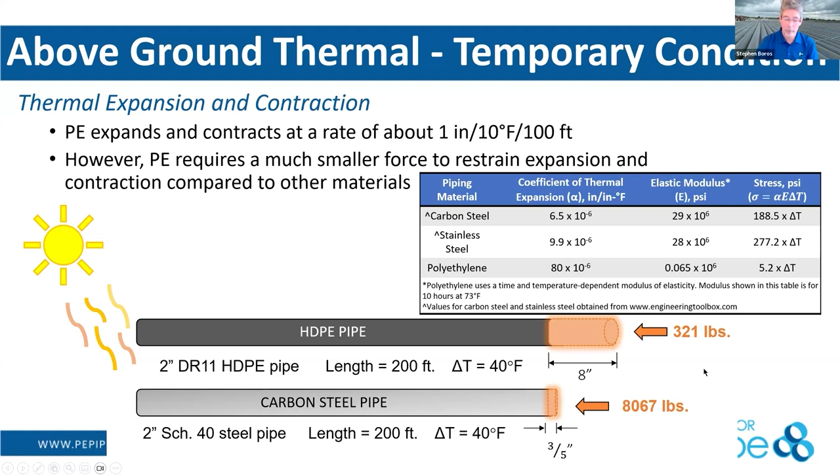Thermal expansion contraction - polyethylene does have a higher thermal expansion coefficient, however it's very easy to restrain because the force it develops is very, very small. With polyethylene pipe, say you got 200 feet of pipe and a delta T of 40 degrees Fahrenheit, you may get theoretically as much as 8-inch expansion. To restrain that, it's only going to take 320 pounds. Whereas carbon steel pipe may only move 3/5 of an inch, but it's going to take 8,000 pounds to restrain that piece of pipe if you don't want it to move off that flange adapter or valve. So you need to take all that into account with polyethylene.

So we've got 3 minutes left. I suggest you go to PPI pace and end it with that, if you wouldn't mind.

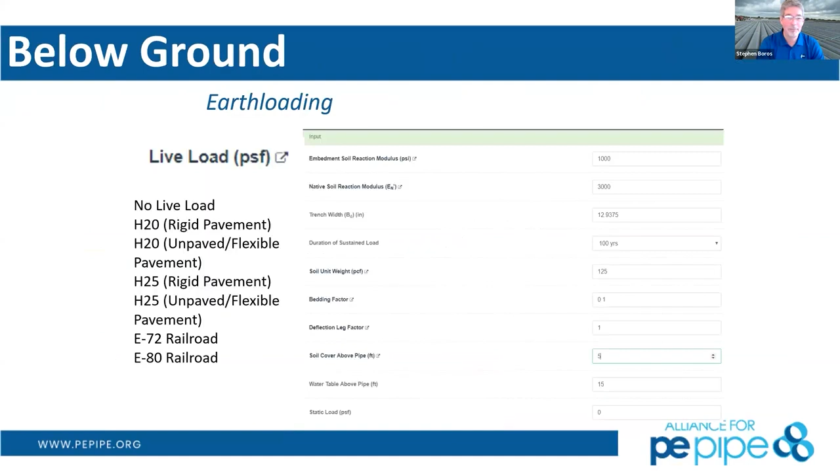Yeah, let's get to that real quick - it's slide 70. Oh, there's a lot of earth loading here. Yeah, sorry about that, no worries, it's all good stuff, I just talked too much at the beginning. My apologies, Stephen, back to you.

Now, we talked about BoreAid a little bit. I talked about all of these things.

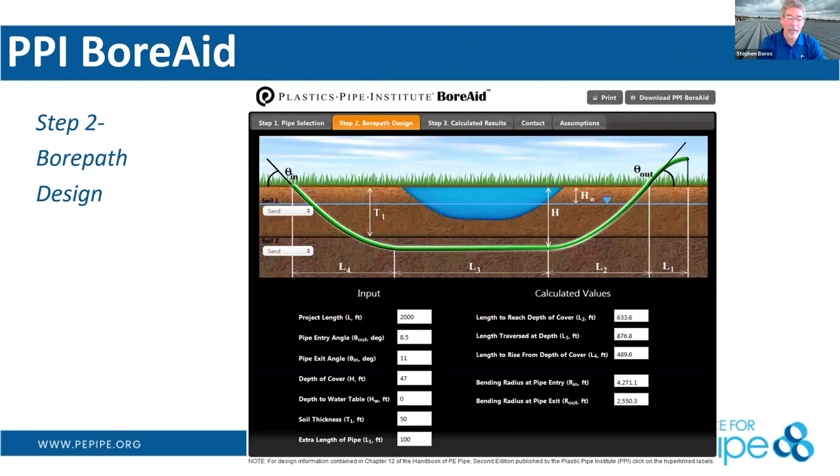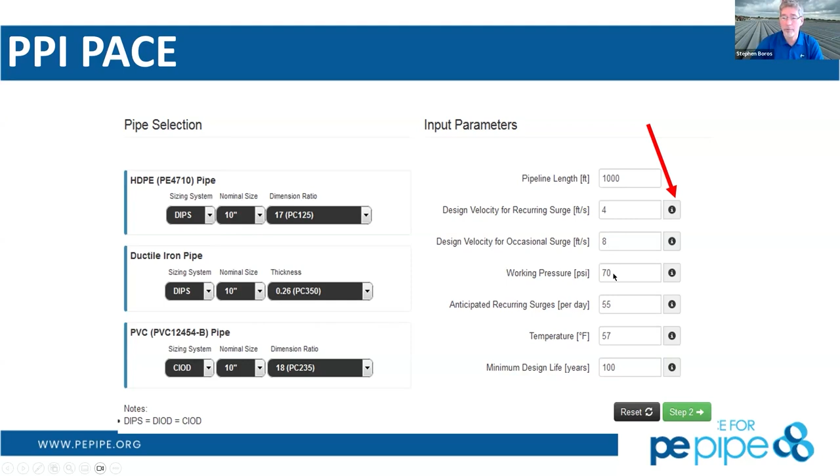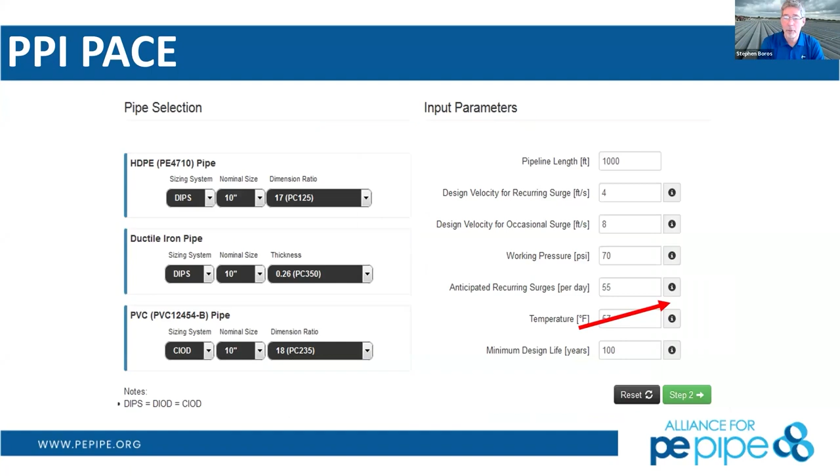Pipe length, velocity, recurring surge, occasional surge, working pressure 70 PSI, surges per day, 100-year design life. What's it going to take to get that? I'll give you examples about where all these numbers came from and support for that. It's going to show you how many surges per day - 55 is what all the design manuals recommend that you go with. That's not anything unusual. And then it's going to give you this output.

It's going to say, all right, for these situations, my flow rate is all going to be comparable. My head loss is all going to be comparable. My total surge, that's where it's going to really start seeing some differences now, because ductile iron doesn't have the same surge capacity that polyethylene has. It has a flat 100 PSI. So make sure that's designed for, and you can take that into account.

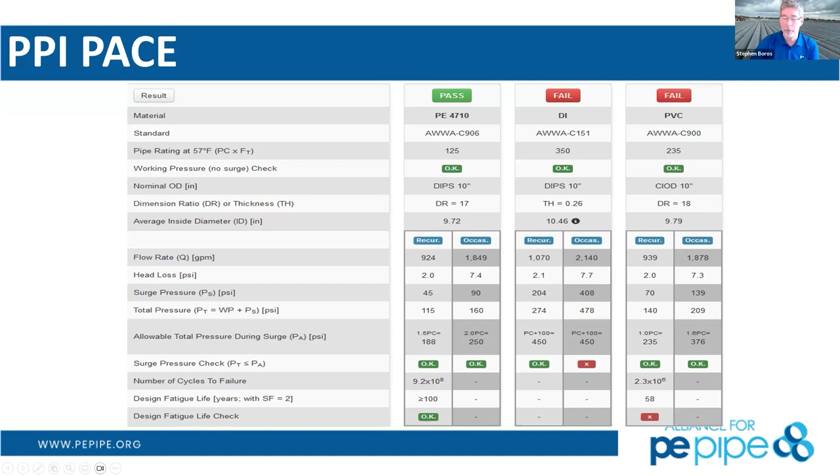PVC has no surge capacity above the pressure class for everyday surges. It does have it for an occasional up to 1.6 times. So again, take that into account. Polyethylene has the 1.5 and 2 times surge capacity above its pressure class. So it's going to see, all right, do I have a 100-year design life on fatigue? And that's how your pipes are going to fail in these situations anyway. So you want a 100-year design life based on that.

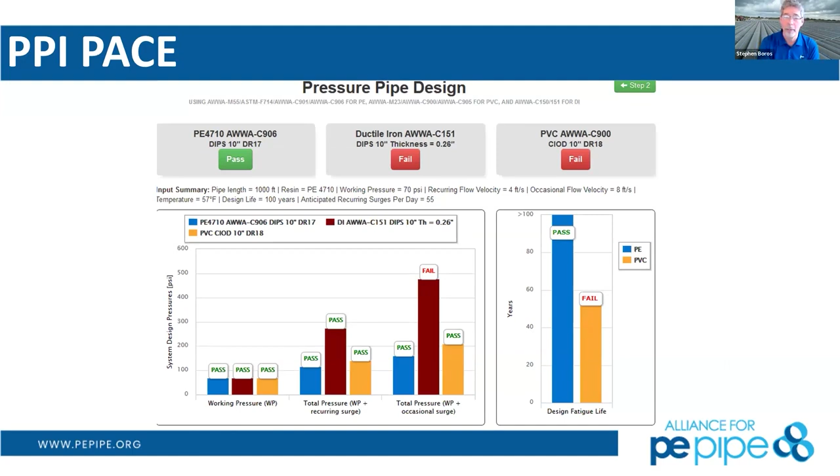This gives you a real world comparison. And this is just the graphic output of the same information from the previous slide - a real world comparison on the different materials. Again, they all work if you design with them the right way, an appropriate way.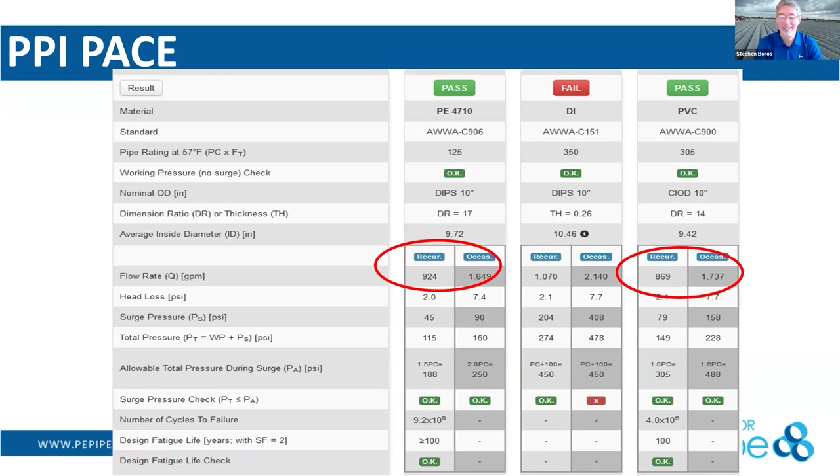What do you think, Alan? Yeah, lots of different resources, and Stephen, your method - what's the word I'm trying to say? I'm flabbergasted. You covered it all. See, that's exactly what I'm going on - a little too wordy, is that what it is? No, no, no, you're very thorough, and that's the best way to be able to be when you're talking about resources in this manner. Because there's a lot of people out there that have lots of detailed questions.